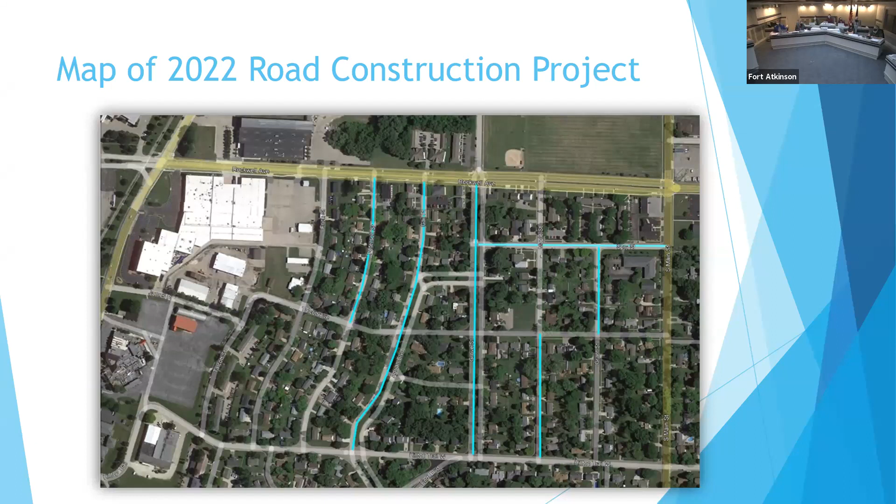Our transportation fund financing, from Fund 5, is $710,000, made up of levied funds, the $500,000 that was in the levy, as well as our DMV registration fees that we collect. The wastewater fund, Fund 2, will cover $30,000, and the stormwater fund, Fund 10, will cover about $50,000. The gap funding we are proposing to borrow is about $670,000.

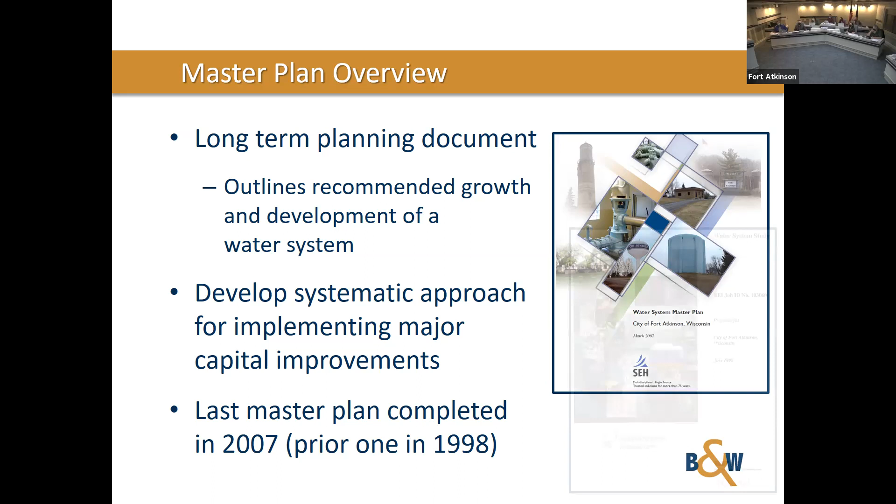Tim did mention I did the 2007 master plan, and that's the cover on the screen right there. And when I was a much younger man, I also did the one in 1998 — I have those files on board somewhere, so I was able to get copies of those.

Some of that information from 98 is a little fuzzy, but 2007 is pretty clear. And of course, we just finished the master plan earlier this year. Those are some of the things that I will go through in the next few minutes.

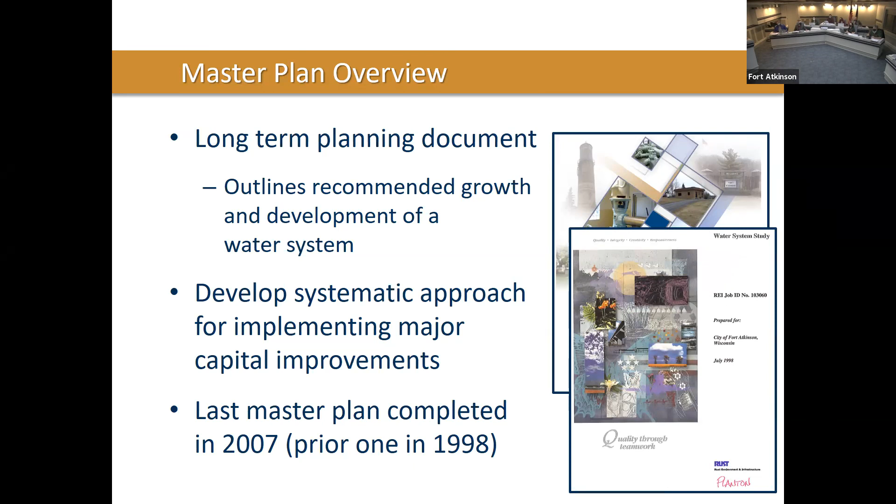First thing when you do a utility master plan is you need to know what your planning boundary is, and especially your planning horizon. Usually for large utility projects, it's 20 years. This boundary came from the city's comprehensive plan, so we didn't create that boundary. We got that from the city, what their long-term look was for what areas surrounding the city would require city water and city sewer. So our plan matches that boundary and also matches the boundary used for any facility planning done for the wastewater utility as well.

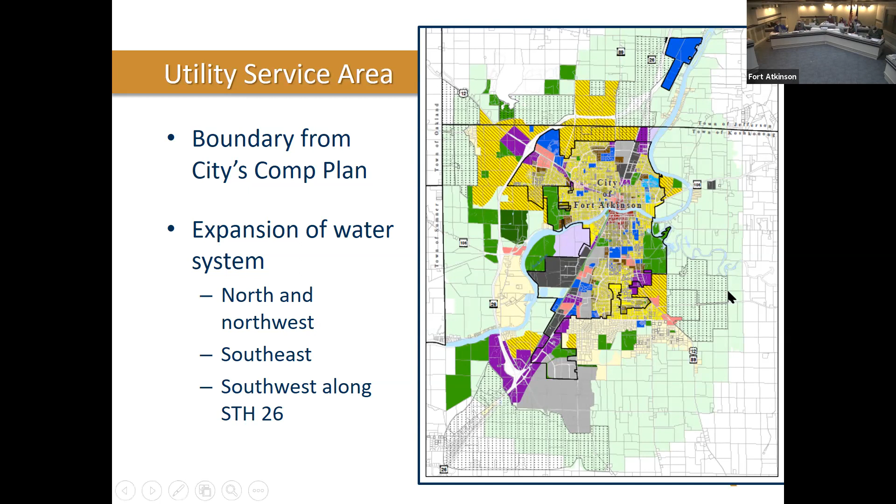Per the plan, the growth that is going to occur over the next 5, 10, 20 years is going to be to the north and northwest, over the freeway and by the high school, to the southeast, east of Highway 12, and also to the southwest. That area has been looked at as far as developing over the last 25 years since I've been doing master planning for the City of Fort Atkinson Water Utility. So that really hasn't changed much, but the development to the north definitely is going to provide some challenges for the water utility that we'll talk about in just a few minutes.

We're projecting the city population—actually, we're using the comp plan and the State Department of Administration's longer-term 2040 population projections. We're using 15,300 as a 20-year population for the city. Population has a big impact on water needs, obviously. We'll talk a little bit about that.

Since the last master plan, there's been a pretty significant drop in water sales for a variety of reasons. Most assuredly, people are using less water every year. The price of water is getting more expensive, so there's a cost signal to the customers—as you're replacing your appliances every 10, 15, 20 years, the new washers and dishwashers use less water, and that's just going to keep happening further into the future. So there'll be less and less water sales for the water utility, which causes some financial pressures because a large percentage of your costs are fixed—in fact, on the order of probably 80%. The upside, though, is that there's been an increase in industrial sales. Not that it will completely offset the declines in commercial and residential sales, but there has been a nice uptick in some of the industrial sales.

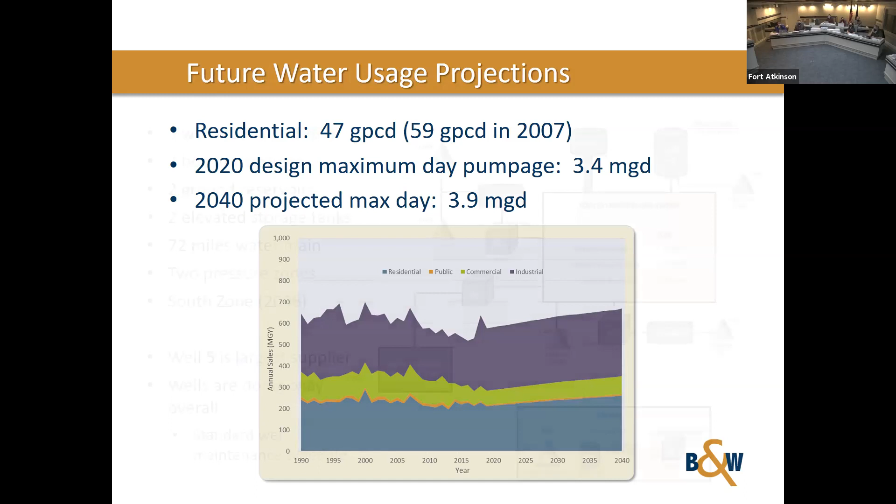A quick overview of the system - I'm not sure how many people know a lot about it, but it's a relatively old system, just like the city is a relatively old community. There are 5 wells. The first, well number 3, was constructed near the river in 1931. The most recent, well number 7, was constructed 54 years ago - so relatively old facilities supplying water for Fort Atkinson.

There are 3 booster stations, 2 ground reservoirs, and 2 elevated tanks - one on the far south side, one up on Hilltop by the park. There was only 1 pressure zone for decades since the origination of the water system. One major recommendation of the 2007 master plan was to create a south pressure zone, because as the utility needed to serve properties further south, it needed to maintain at least a 35 pound per square inch pressure as required by DNR. So a new pressure zone was developed with a booster station to raise the pressure and begin serving those homes and subdivisions further south.

It's kind of the same situation we'll talk about on the north side of the city in the future as that area develops outside the city limits. Well 5 produces almost a quarter to a third of the water in the system, even though you've got 5 wells total - Well 5 over in Jones Park is a big, very consistent producer.

Overall, these older facilities are doing well. They've been maintained on a regular basis, and there's no reason why the 5 wells can't supply good quality water to customers for years to come. So I'm not too concerned about needing new wells or replacement wells. That's good news, because new wells are hard to get permitted through the Public Service Commission and the DNR, and they're expensive - probably $1 million to $2 million per project. I don't think you'll be in that situation, at least over the next 20 years. So that's real positive news for the utility.

One of the things we didn't do in 98, or I didn't do in 2007, is we looked at pumping efficiency, electrical efficiency. It's kind of a big deal now with renewable energy and trying to make maximum use of your facilities and be very efficient. So we did some wire to water pump efficiency tests, looking at how much electrical energy is going into the motors and how much mechanical energy is being produced by the pumps.

Good news is the well pumps are either good to excellent on a performance efficiency basis. Booster pumps, a little bit of a mixed bag. The station right across the street, the main station, that's 50 years old. Those pumps really haven't had much work done to them, so it's basically original equipment, both electrical and mechanical pumps and valves. We kind of anticipated the efficiencies may not be as good, and they were actually a bit lower than I thought they might be.

So booster pump efficiency, fair. There's a pump over there that's used quite a bit, number 302, that's really on the poor side.

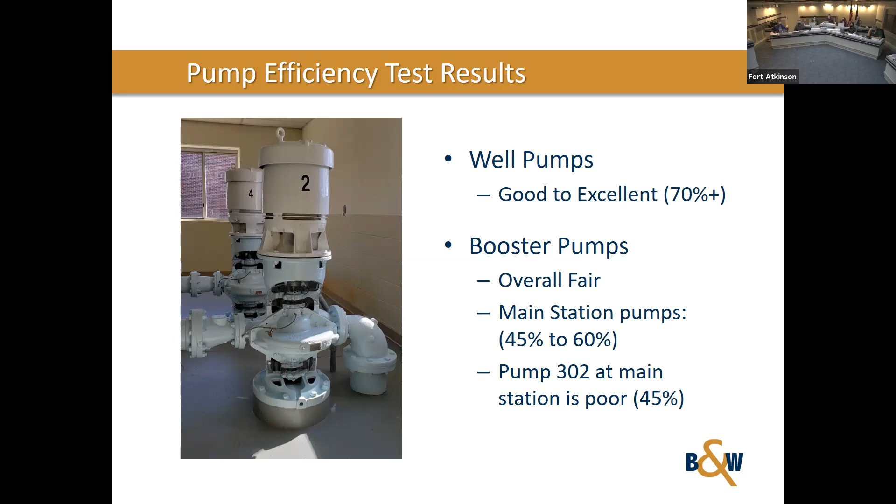So that leads us to one of our next recommendations. It's going to be looking at replacing the equipment over there at the main station. I mentioned it was put in 1971. The electrical equipment is old. If there's failures, you're not going to find spare parts to replace that equipment just because it's so old.

The smaller pumps, 1 and 2, virtually run all the time. The larger pumps, 3 and 4, really don't run much at all because they're much higher capacity. Tim's got a concern that those larger pumps, because of the way they were designed 50 years ago, larger capacity pumps, there's some surging in the system, potential discolored water in the system because of the higher capacity. And the potential always is there for larger pumps being operated causing main breaks. So consequently, they don't get used much unless there's flushing going on in the system.

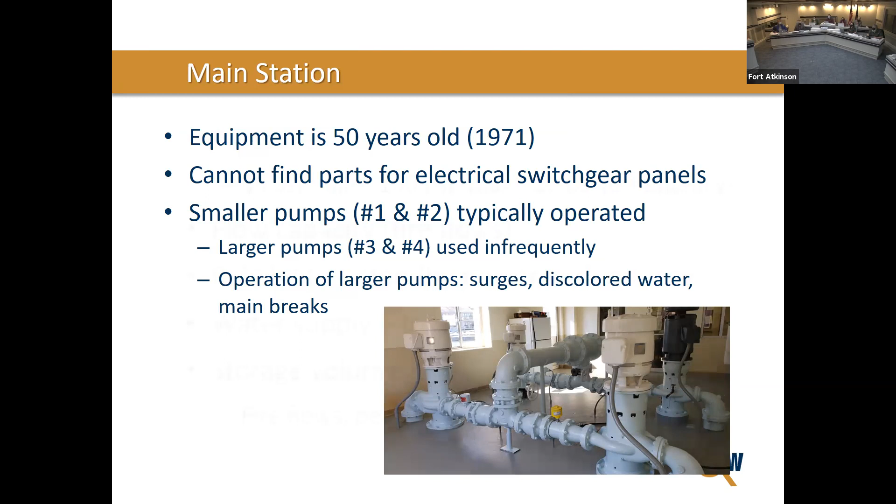So that's the existing system, kind of a brief overview. We looked at the system itself, kind of built on what I looked at in 98 and 2007, looked at pressures, looked at fire flows, flow capacity within the system, the reliability of the system to meet their customer needs when there's a power outage. Also looked at how much supply you may need in the future. We talked about that just briefly before, and how much storage you might need.

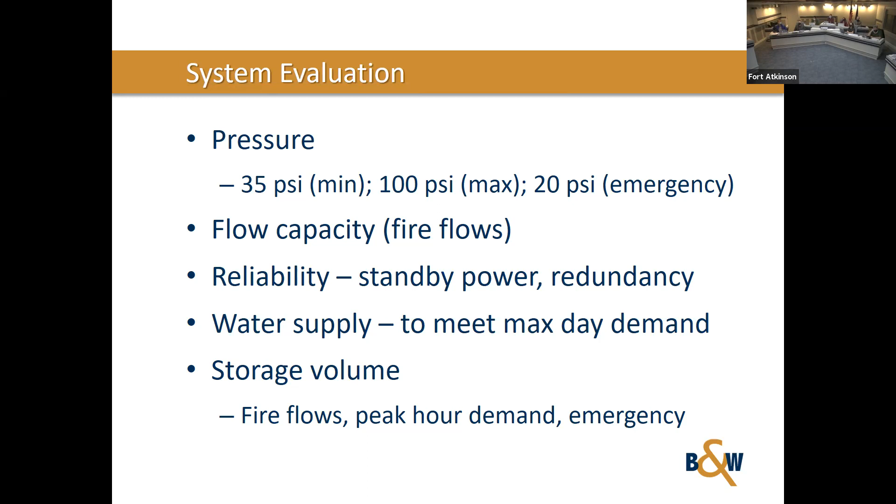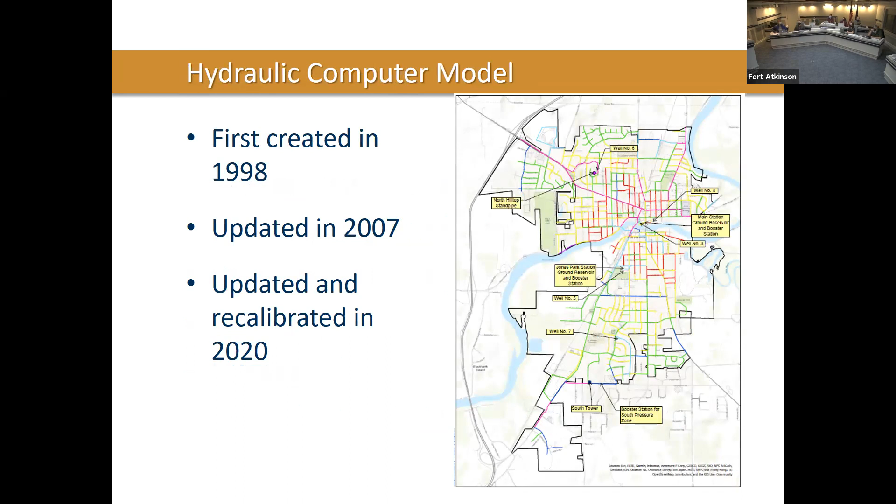One of the things we actually did 20 plus years ago was create a hydraulic computer model of the system. And it's been updated twice now over the last 20 years, so that we can model flows and pressures, things on the computer, and it gives us a real good handle on what actually happens in a complex system.

So we looked at pressures, and this is a GIS map, overlaying your GIS mapping for the city. There's a very small area - everyone's probably familiar with where the Hilltop Standpipe is, this area right up here. It's not probably surprising to anybody that in that high elevation area, pressures are on the lower side, maybe 35 pounds. 35 pounds of pressure is the minimum code requirement by DNR. The maximum is 100. So the only place there's really an area that rubs up against that DNR standard is that area around the Hilltop Standpipe.

But that's the same thing we came up with 24 years ago in the first master plan that we did in 98. Pressures in the blue area, that's between 50 and 65 - pressures really aren't a concern in your system. The development to the north, as you can see, this green area, that's pressures between 35 and 50, and the elevation just gets higher as you go north and northwest. So the existing system is not going to be able to serve those properties. I think everybody pretty much, especially on the utility side, knows that.

And as you start to develop anything beyond your corporate boundary to the north, you're going to have to do the same thing you did in the south with the south pressure zone and a booster station. So as soon as that development dictates that, the utility's going to have to respond accordingly, be prepared to do that, because it could be a 1 to 2 year project potentially if that has to happen.

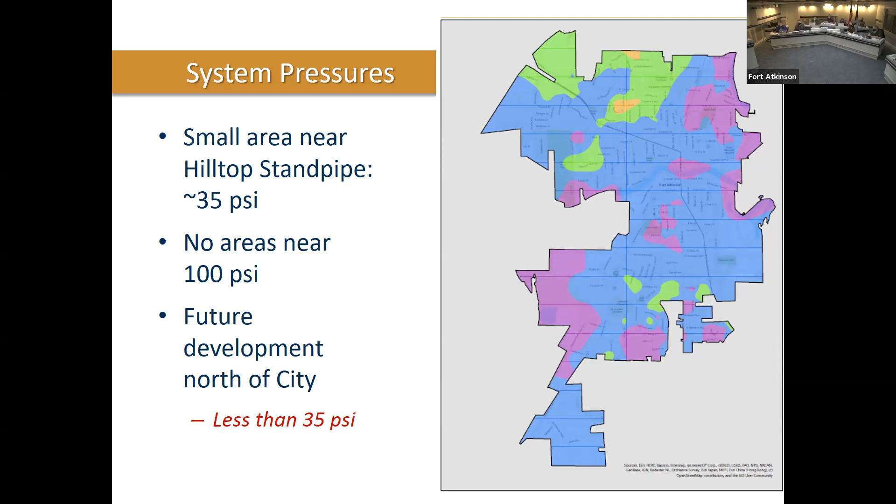That's not to say it's substandard, but we'd like to see at least 1,000 gallons per minute. I'm sure if the fire chief was here, he'd say more is always better from the fire side. But in general, the city is very well protected for fire protection for the water system.

But in general, the point to take home is that the city's fairly well protected. One of the things the city did was some major improvements to the fire department and some water system improvements as well. Your ISO classification went from a 4 to a 3 in 2019, which was a great benefit to the city, and any industrial and commercial fire insurance premiums should have gone down to reflect that better protection for those customers. So that's a real good thing for the city overall for fire protection.

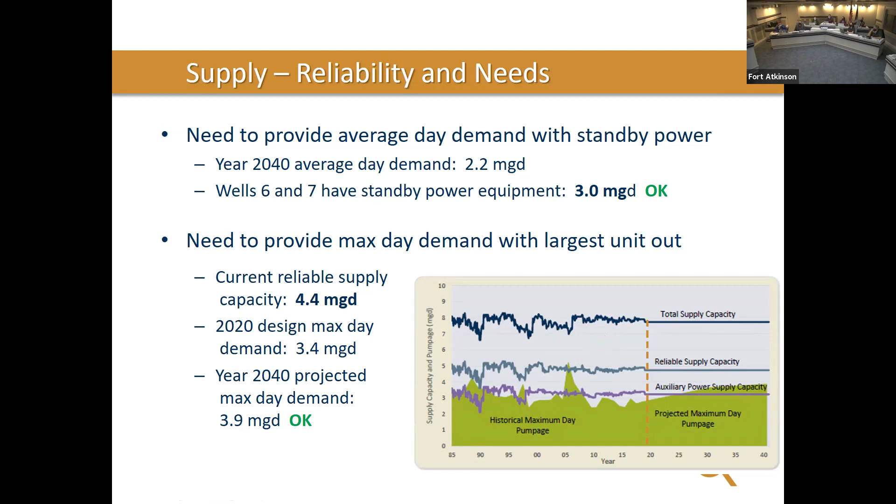The last thing from the evaluation is looking at storage needs. Water systems have storage for a variety of reasons. Pressure equalization helps control pump starts and stops with the water level in those tanks. Fire flow, obviously, emergency water is available at a moment's notice when it's sitting up in the air. It doesn't have to be pumped into the system.

Currently, you've got storage needs of 1.2 million gallons. Projected in 2040 is 1.3 million gallons. You've got that 1.3 million gallons right now between your 2 ground reservoirs and your 2 elevated tanks. So you won't be needing any elevated water tanks for pure storage in the whole system.

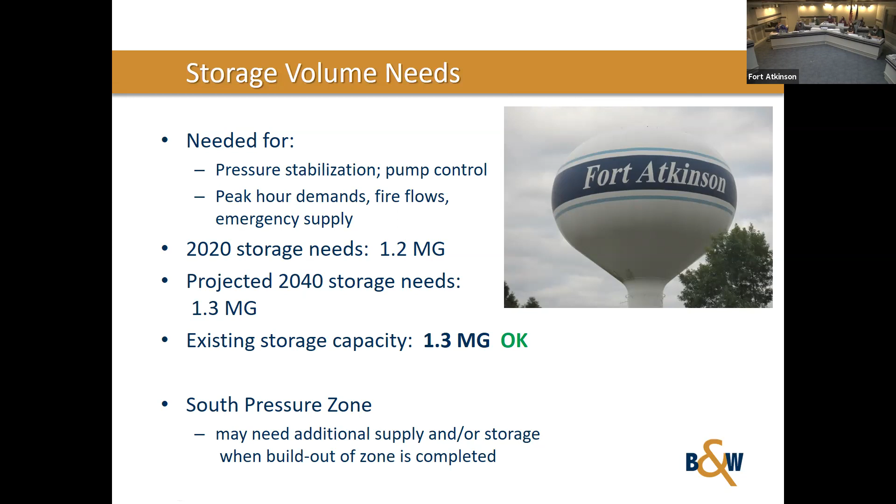But if you look at the south pressure zone, and potentially the north pressure zone in the future, as those get built out, a booster station may not be enough. You may have to put in a 250,000 gallon elevated tank. And we've got that in our recommendations for longer term improvements.

So getting to the tail end of the report, the main recommendations: we talked about the main station. We'd recommend that the existing 50-year-old equipment, both mechanical and electrical, be replaced, including new valves, and put in variable frequency drives for those pumps to eliminate the surge suppression. It'll be much more efficient, and it's time—they've really used it over its useful life. That budget estimate's about $400,000 to do that. Not just inside, nothing with the building, nothing with the structure, just the electrical and mechanical equipment.

Talked about the north high level pressure zone. That's really going to be when that development dictates. I guess it's important for everyone to realize what could happen in the future out there so the utility can respond accordingly. And if there has to be borrowing, which I'm sure there'll have to be for a $1 to $2 to $3 million project, you have to make sure that that is ready to go.

I think the north zone can just be handled with the booster station initially, just like the south pressure zone. When that area gets fully built out over the freeway, you might be looking at a water tower because there'll be some higher fire flow demands that are required, and a tower would help you achieve that. But that's long term down the road.

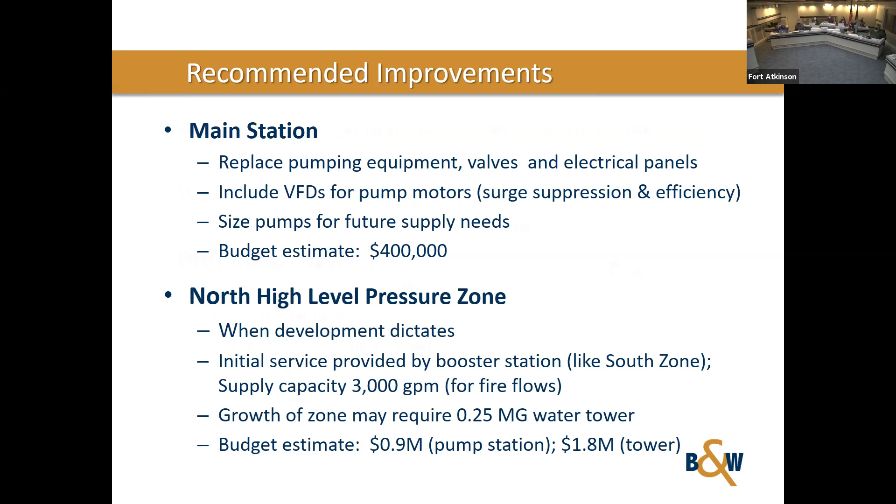We talked about the South Zone also needing some elevated storage or maybe more supply, but that's again at full build out or approaching full build out. We talked about the well rehabilitation—try and do that every 10 years on a regular basis to keep that supply capacity up. Distribution system: we had some recommended improvements to replace some old mains, some problem mains that have been on the plan for a while, replacing some smaller 4-inch mains that you've got in your system.

Andy's going to put together a plan to look at long-term, over 20 years, at the best way to look at replacing infrastructure—not only street, but water, sewer, storm. And that's part of what this plan has helped to support.

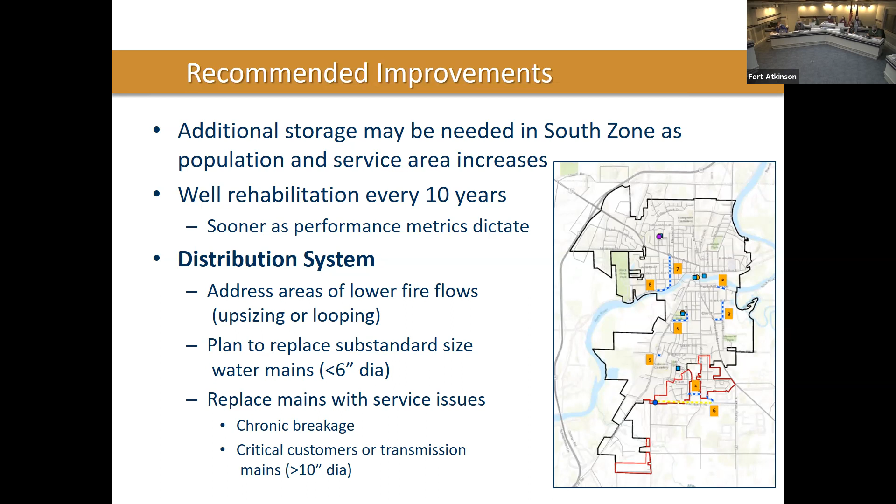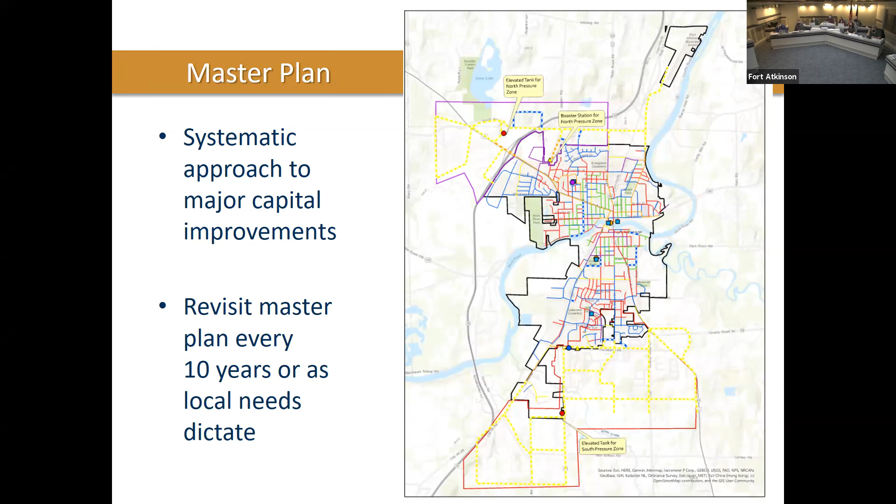And then the infrastructure replacement program, again, a little more than $1 million a year. That's discretionary—it has to work in with the plan that Andy and Tim are going to work on. So the master plan is a systematic approach to look at long-term improvements to a major utility system like Fort Atkinson operates. Tim had mentioned trying to revisit this plan every 10 years or so. If there's a lot of development pressure, I tell some clients maybe every 5 years; maybe you can go longer than 10 years, but that's what I would recommend. Based on my experience with Fort Atkinson over the last 25 years, that's the appropriate time.

That's my presentation. Hopefully I haven't missed anything. Andy, anything I need to mention? Tim, anything I need to mention? I'd be happy to take any questions, comments, concerns.

All these high school kids are budding water engineers. That's why they came here.

I'm just curious, within the recommendations, both short term and long term, do you give those a prioritization ranking? If the department or city can't address all of those things, here's our suggestion of where you should start, or what the most pressing issues are.

The main pump station is number one. That needs to get done just because it's a 50-year-old structure that is used a lot, and it's right down in the middle of town here.

It's a very critical part of the infrastructure of the overall water utility. The north pressure zone is going to be dictated on when that development happens. As far as the infrastructure replacement program, that's a plan that Andy, Tim, and you folks will have to put together because that's a big price tag. But the biggest improvement short term would be the main station for sure.

After that, long-term improvements start to get into crystal ball territory - any water towers that might be required north and south, again depending on development. In the short term, you can handle that with the booster station, and that won't be $1 million, it'll be something less than that.